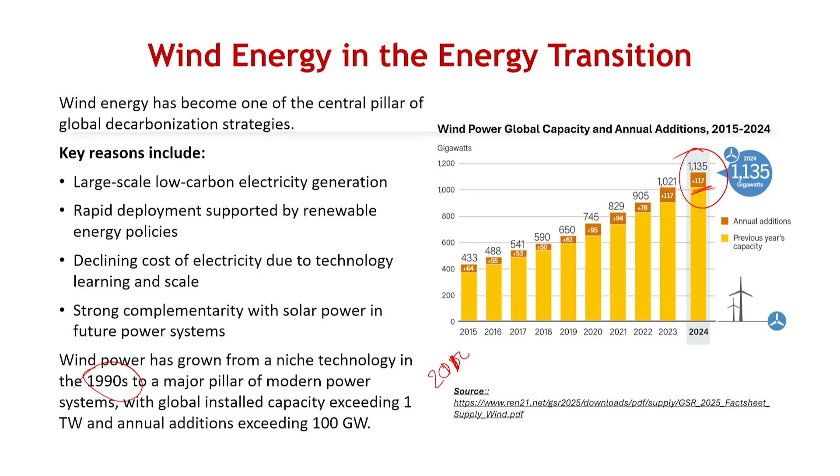Since its CUF is higher, from a generation perspective, it is already significant generation worldwide if we compare it to solar. That's pretty interesting. Also, the year on year growth has been to the tune of almost 100 gigawatts on a yearly basis - slower than solar, agreed, but nonetheless a very significant number if we look at this number in isolation.

What wind has done over the last many years is contributed very significantly in several countries already. For example, in Denmark, more than 50% of net electricity comes from wind, and almost 60 to 70% of Denmark's net electricity gets generated through wind energy, a very significant number for any country. In fact, countries like Ireland and Portugal are about 30%, Germany and United Kingdom more than 20%. Globally, wind contributes almost 8 to 10% of electricity generation and about 4% of total energy generation.

But numbers are not that important. What is more important is to understand that this is one of the very significant portions of this whole renewable energy transition which is happening.

We all know what leads to wind generation. It's basically uneven heating of Earth's surface by solar radiation, which leads to differential temperature at two places, which leads to differential atmospheric pressure. Because of the rotation of the Earth, plus areas like mountains and oceans having different temperatures compared to land, all these things lead to zones sitting at different pressure and temperature. For that equivalence to be maintained at a pressure or temperature level, there is a gradient of molecule movement from one side to the other, which leads to wind generation.

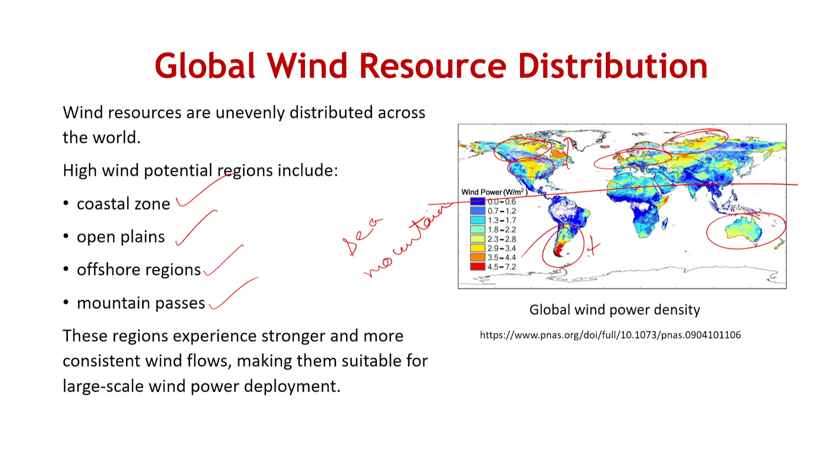So there will be specific locations within those specific geographies where the wind potential is high. Within that too there will be specific locations where wind is available more compared to other places. Unlike solar, where you can do a broader area radiation identification and broader level deployment of resources, wind becomes slightly more tricky in terms of assessment, in terms of potential and availability. That's why wind is trickier in terms of exact assessment of how much resource is available and what can be done with this source overall.

Once wind is available, how you convert this into electricity is very simple. Basically wind is blowing, so that's kinetic energy. That kinetic energy rotates the blades, which gets converted to mechanical energy. From that rotational blade, you put it on a generator, and through that generator the mechanical energy is converted into electrical energy. That's the chronology in which wind works.

So wind blows through turbine blades, creating aerodynamic forces. These forces rotate the rotor connected to the shaft, and once the shaft starts to rotate, the generator located in the nacelle starts, driving that generator and converting mechanical energy into electrical energy. Then that electrical energy, once generated, can be put into the grid and transmitted for consumption.

So that's how it's a very simple phenomenon, not very complicated. It's almost like a simple plug and play kind of model. Once you have the right turbine, the right generator, and the right blades available, electricity can be generated.

As you can see, generation will depend upon wind speed, the type of blades, the type of generator, and many such parameters. So let us look at some of these limitations, and why we need to look into them is not only from the technical side, but these limitations also lead us to understand where the windmill can be deployed.

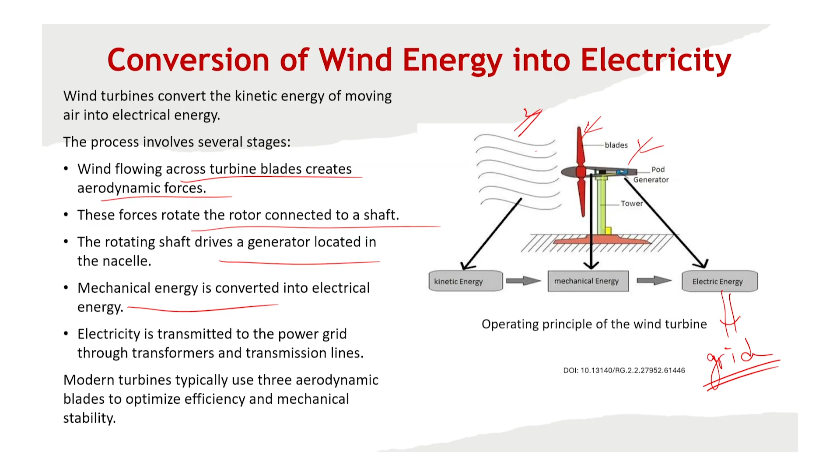In terms of power available from the wind, power depends upon the speed of the wind available, so there is a cut-in speed. Below that cut-in speed, the wind doesn't have enough kinetic energy to turn the blades, so power generation will not be there. Once you reach cut-in, typically about 4 meters per second, it starts generating.

Then there is a cutoff speed up to which it can generate energy, and a rated speed at which it gets maximum efficiency in terms of power output from the windmill. Beyond that it starts to reduce its generation, and beyond a point you reach a cutoff speed above which you cannot generate, because there's a high chance of the wind damaging the windmill itself. That's why there's always a cutoff speed put in most windmills.

As you can see, the generation of power is directly proportional almost to the cube of the wind speed. Since it's proportional to the cube of wind speed, the location of windmills becomes of prime importance. The same windmill put in an area with one wind speed versus another can lead to a huge difference in generation. This kind of variation is not there in solar cells.

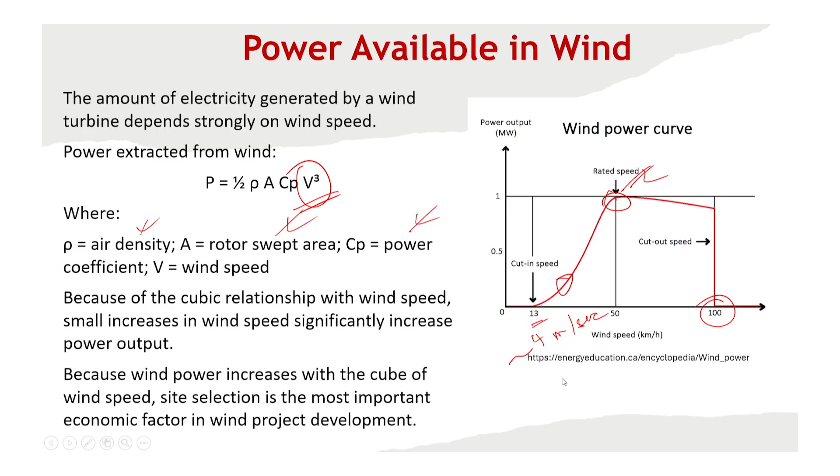That's why solar cells are slightly more forgiving in terms of errors for deployment, while windmills have a much more stringent deployment norm, because power depends on the cube of wind speed, air density, rotor swept area, and power coefficient. Higher air density means more mechanical energy, so at the same speed the blades can rotate faster. It's all about the kinetic energy present in the wind leading to energy generation, which makes it highly critical where windmills can be deployed. That's one nuance that policymakers or deployers need to keep in mind.

Second, whenever energy is generated, not all of it can be extracted. If a turbine extracted all kinetic energy, the air behind the rotor would stop moving, so additional wind could not flow through the turbine. Aerodynamic theory shows the maximum efficiency limit is about 59.3%, but typical windmills achieve about 40 to 50% efficiency relative to available wind energy. So it's not just about wind speed - you also need to consider what's the extractable limit you can potentially get from these windmills.

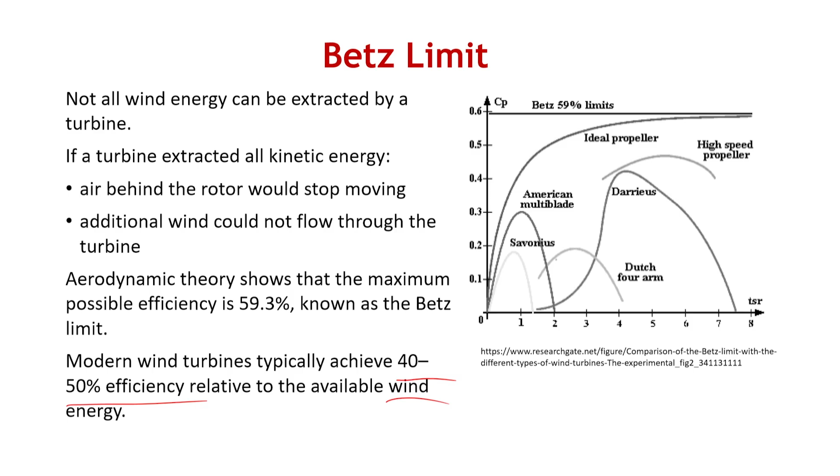Another concern, as seen from the power generation equation, is the swept area - the area covered by the sweep of the wind turbine blades, since that's where it cuts the wind. How large the swept area is will directly determine the power that a single windmill location can generate. A lot of research has happened on this, and it continues.

What's happening now is research around maximizing generation from a single deployment. If you want to maximize generation from the same horizontal location - since vertical erection means the horizontal area stays almost similar, and land becomes a cause of concern - you want to maximize generation from a single point of deployment. So windmills are getting higher and higher, and the wings are getting longer and longer, to increase the swept area.

This makes the installation of windmills very tricky, because these are sometimes put in very remote areas. Just the transportation of these big windmills from the point of manufacturing to the point of deployment becomes very tricky. I'd encourage some of you to look at videos online on how these big windmills are transported from manufacturing to deployment - that's a very tricky thing this industry faces.

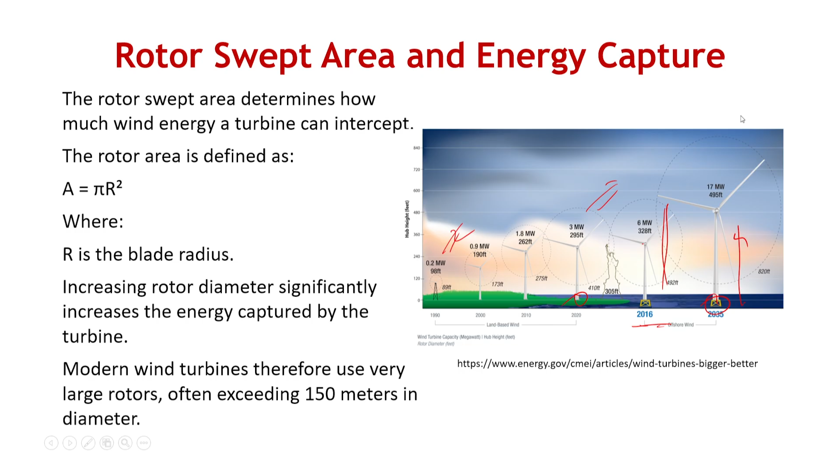So these are very, very tall windmills that we are talking about, not a small installation. The modern windmills are using larger and larger rotors, now exceeding about 150 meters, and we'll see the implication of this in terms of energy generation and possibilities.

Another technology getting developed a lot these days is the vertical axis wind turbine. It's not new, it has been pretty well known historically. So far we've been talking about the horizontal axis wind turbine, where the movement of the wind is in the horizontal direction, and the wings are moving in that plane.

The other kind of generation is the vertical axis wind turbine, where you have an axis that vibrates around a single position depending on the wind speed. It has the advantage that it can work at very low wind speed. The disadvantage is that the efficiency of such systems is usually poor, because the rotor axis is perpendicular to the wind direction, so it usually has much lower efficiency.

Large scale deployment is a concern with these, while horizontal axis wind turbines, historically used a lot, have rotation axis parallel to the wind direction and much higher efficiency because of that. Overall this technology has historically shown very good results.

But vertical axis wind turbine is a big area of research these days, specifically for geographies where high wind speeds are not available. It is being explored a lot in those specific areas. Even some research labs in the US are trying to show that for some offshore wind deployment projects, vertical axis wind turbines may be an interesting solution, so more research is going on in that area.

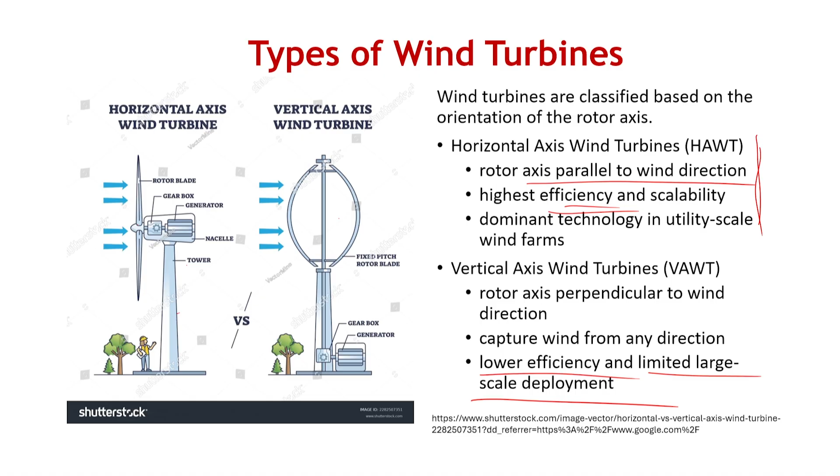Let us see how it progresses, but that is another technology to keep an eye on. Some research is also going on about generating wind power even on highways. Some of these winds are not very reliable, like from the movement of a car, since it cuts through the wind and there is movement of molecules at that point, leading to some aerodynamic pattern generation and vibration, which people are trying to capture by putting small vertical axis wind turbines on highways.

A lot of research is going around this area, and it's a kind of new research these days. So while we say all this, we now need to understand what it entails, what is the limitation factor of some of these wind turbines, what is happening worldwide from an economic level perspective. Let us try to understand what goes into a windmill.

Simply put, it works like this: there is a rotor blade that captures the wind, and a hub connecting to the blade which moves. The nacelle contains the gearbox and the generator, and there is a tower supporting the whole turbine structure, because it has to support the big weight of the nacelle and the wings overall. It's like a pole on which a huge weight is placed, and that weight is not stationary, because as the wings move, it puts additional pressure on the structure.

As you can imagine, a lot of metal goes into the construction of this thing, because it needs to be a very sturdy structure which handles all the kinetic energy of the wind it faces. It has to handle the moment of the wings and blades as they move, and on top of it, it can really sit in windy areas.

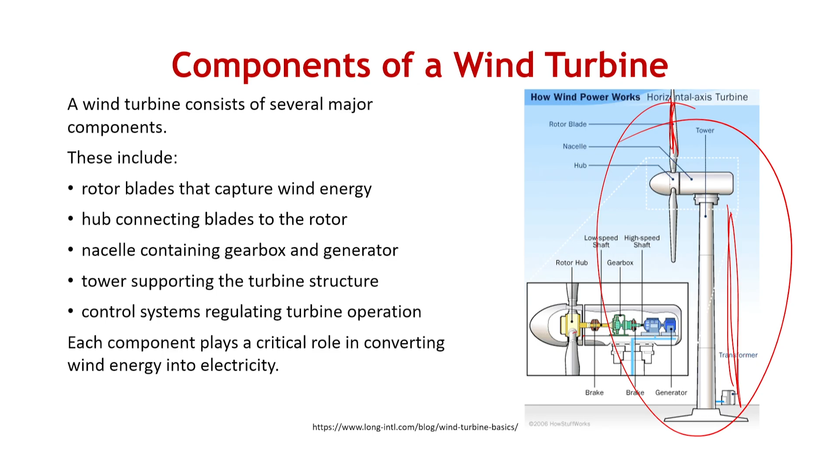That is done for two purposes: to avoid windmills having too much resistance on the wind, since if resistance is very high it can lead to failure of these windmills at times. So with all this, a lot of big wind farms are being deployed.

It is typically deployed in big areas, because once you identify a potential area where this kind of power generation can happen, you want to do a large scale deployment, to exploit the potential of that area as much as possible. Then you can put it together on a grid as a single generation point, to avoid having to connect a grid to each different structure. So overall, like in case of solar, wind farms are also increasing more and more in size.

Also, since the land area can be limited, and the sea itself can be a huge potential area, the area joining the sea and the land can be very interesting, because the wind speed in those areas can sometimes be very high.

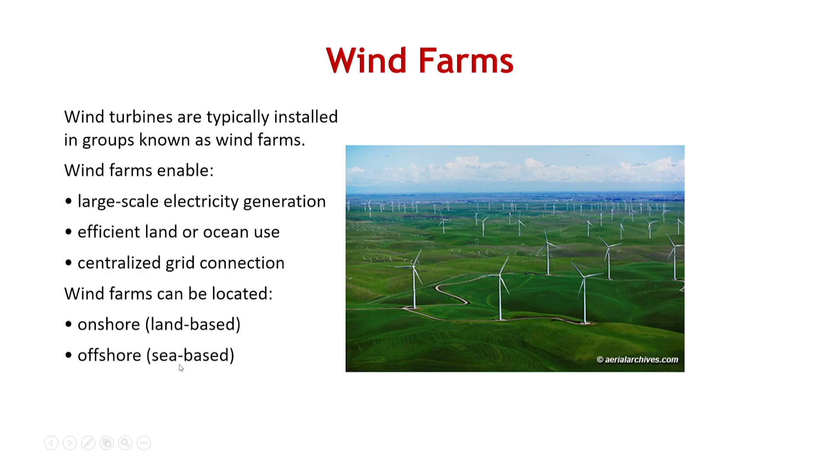So what is getting developed these days is what is called offshore windmills. Onshore windmills, which I have talked to you about, are very popular and are running about 120 meters these days, projected to move towards 130 meters. Offshore windmills are already working at a much higher capacity for the same height.

Just to compare, for a hub height of 130 meters, projected for 2035, a typical windmill capacity will be 5.5 megawatts. But a typical offshore windmill of about 100 meters can have a capacity of 6 megawatts, just because of two factors: the wind speed can be higher, and the wind availability in the day can also be higher.

Again, remember what I talked about in terms of solar, like CUF. So CUF of offshore windmills is higher, and the specific wind available is also higher. So overall, a lot of installations these days are talking about offshore wind turbine deployment.

At a very high level, onshore winds have a lower cost of installation and lower maintenance cost, because they are sitting on a land area, so reaching and maintaining them is easier, and they can be easily connected to grid. That's why onshore wind constitutes most of the wind power generated today.

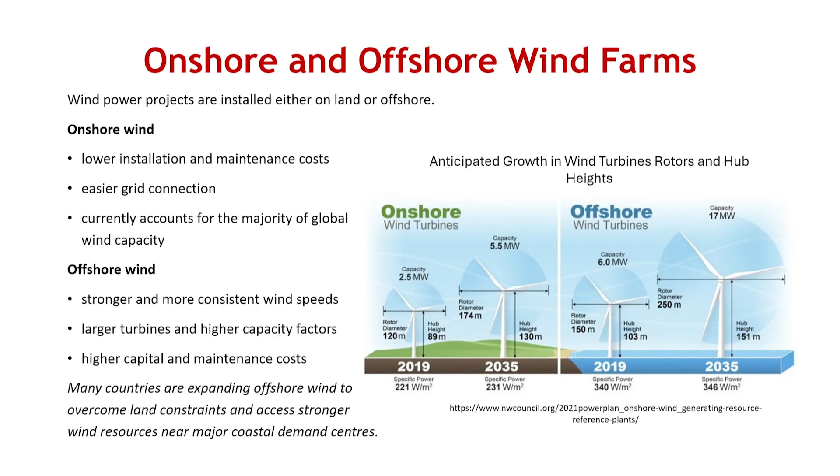Offshore has huge potential, because stronger and more consistent wind speeds are available in that area. Larger turbines and higher capacity factors are possible, but at the same time it would also mean higher capital and maintenance costs. So this will have its nuances. What will finally determine it is the potential of a specific area and the cost of generation, and we will see some more numbers on what that looks like.

When we are doing wind farm deployment, one factor we need to worry about is called the wake effect, where wind cut by a specific windmill can impact the wind availability for the next windmill just behind it. Part of the energy is extracted, so wind speeds can decrease and turbulence might increase, creating a wake area between one windmill and the next.

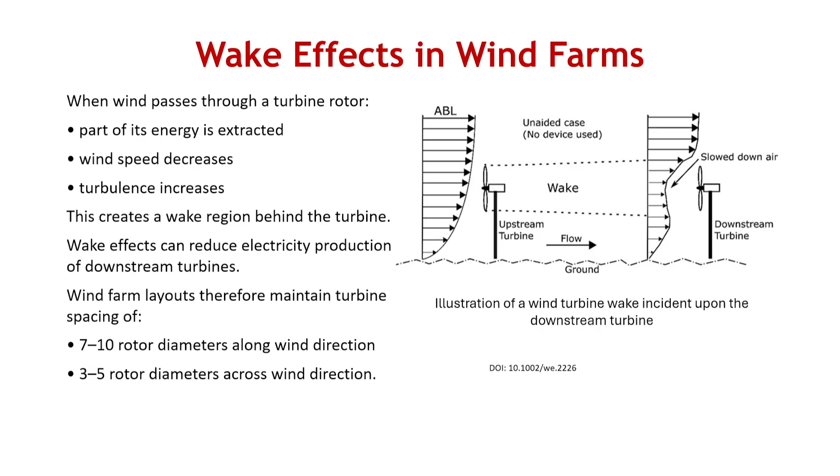When deployment happens, usually a minimum distance is kept between two poles of wind generation, and sometimes they're not placed in the same direction. Sometimes there's a cross deployment between one tower and another, just to avoid the wake effect impacting the other. So a lot of technicalities go into this deployment.

For finding the potential of these windmills, we do a wind resource assessment, usually using wind speed measurements at different heights. We go about finding what wind speed is available and what the long-term wind pattern is for that area.

Then we estimate the overall energy potential of that specific area. We evaluate the whole terrain and do surface roughness measurement. So overall, a lot of background work is done before we do this windmill deployment.

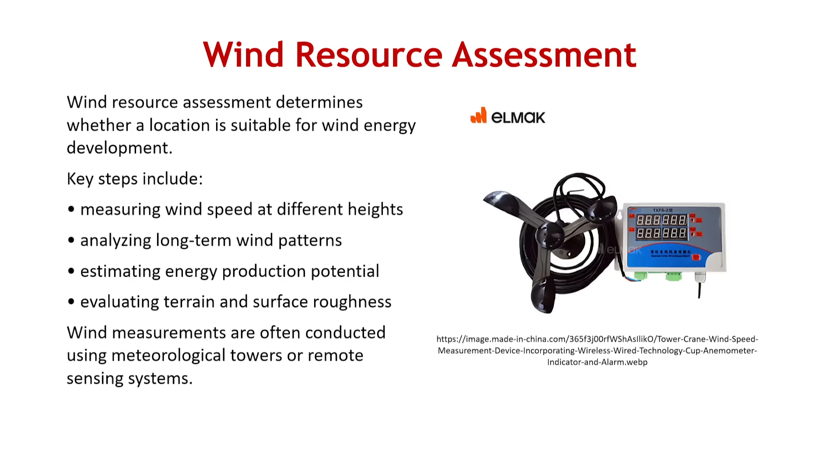It depends a lot on the wind speed, the availability of wind throughout the year, and what kind of seasonal variations we're talking about. This all has policy implications, because when releasing tenders, the assessment of the resource has to be done with much more rigor, otherwise the whole tender specification may not be met.

Once you do all this exercise, since wind is a very interesting resource available throughout the year, one of the big things seen all over the world is that while typical solar PV capacity utilization factor was in the range of 18 to 25%, India was sitting at about 19.5 to 20% CUF. These onshore winds can have much higher potential of 30 to 40% CUF, and that is impressive.

So the same 5 megawatt installation in that term can give about 20 to 30% more production, which could be higher, leading to the lower LCOE of windmills more or less all over the world.

Offshore winds, as I showed you, can have higher CUF because of wind speed. The availability of wind throughout the day could be higher because of the temperature difference between the sea and land area. And since these installations are usually around the coastal area, within a few hundred meters of the coast, wind speeds are usually very high.

With this in mind, offshore wind can have a capacity utilization factor much higher than that too. So that's a very interesting phenomenon to understand.

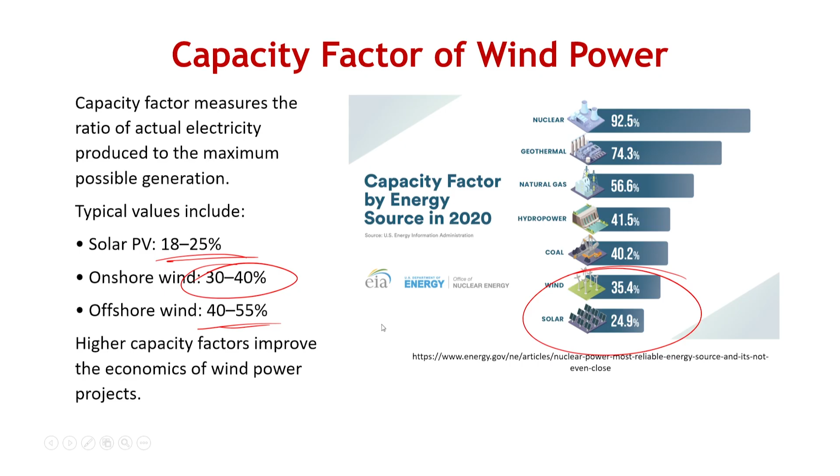With all this put together, we can do an energy yield estimation of the wind. Depending upon wind speed availability, wind distribution, what kind of turbine is available, and what kind of wake losses we have in our deployment, we can do an estimation of exactly what power will be generated.

Of course, there will be an upper cut limit above which the power will not go up. At around 25 meters per second, this is the cutout speed above which you don't allow the windmills to operate, and you lock the wings so they don't move, otherwise there are chances of the wings getting damaged.

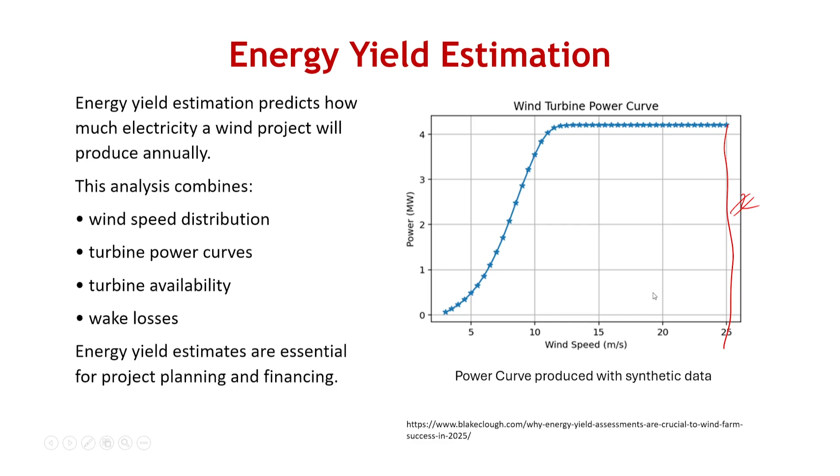With all this put together, the global capacity, as I showed you this data earlier, has really grown pretty big. We are talking about more than 1 terawatt. I will talk about this number with you.

Annual capacity is exceeding about 100 gigawatt year on year, while historically it is Europe, China and United States which has done more deployment. More and more deployment is happening in countries like China and India. So India is also catching up in this race, and it is becoming one of the top generators of this renewable energy source from wind.

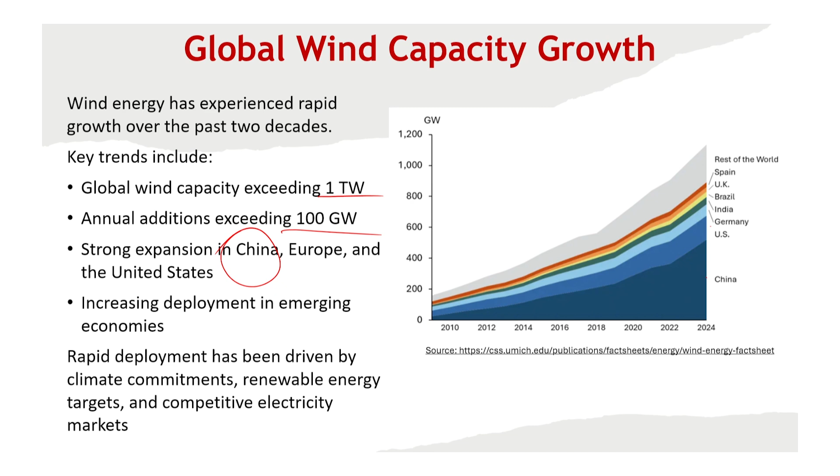If you start looking at this graph, India is coming out almost at the 4th or 5th place in the world, which is very significant given the late start India took, making a serious dent on this line. This is becoming an interesting proposition from that perspective.

And of course, what led to this, and we've already talked about this number a bit, is that the cost trend in wind energy has been pretty impressive. This is one of the best LCOE shown throughout its journey for many years now. While solar started giving this LCOE here itself, wind has been giving very impressive LCOE since around 2010, 2011, or maybe 2014.

Of late, it has increased a bit, and the reason is that some metal costs have gone up, and supply chain issues have led to this increase in cost of onshore wind deployment. But still it is one among the lowest cost sources of electricity as of now, comparing to solar. So now it has caught up with solar. It used to be lower than solar at this point, but now it is almost equivalent to solar in terms of actual LCOE.

Offshore wind cost, however, is slightly higher. While onshore wind was about $50 on average, offshore wind has been on the higher side, and the overall total cost of installation has also been high. The reason is that there has to be construction and installation on the sea, an offshore transmission structure has to be put in place, and maintenance has to be done in a very harsh marine environment. That's why the offshore wind initial cost of capital has been pretty high earlier.

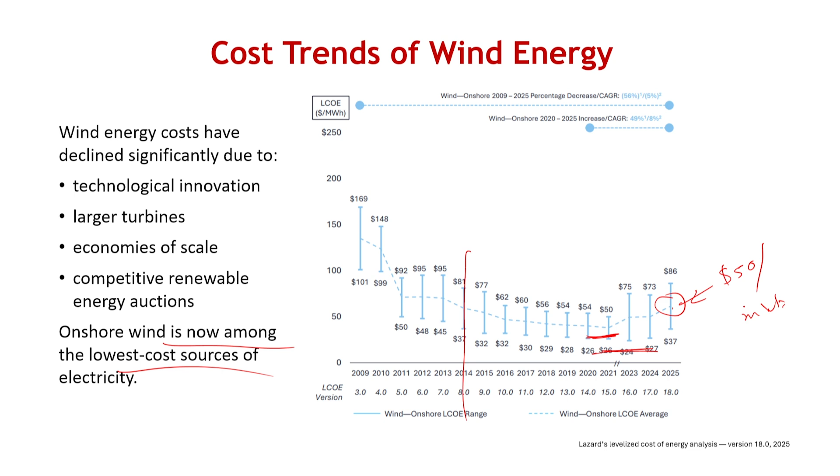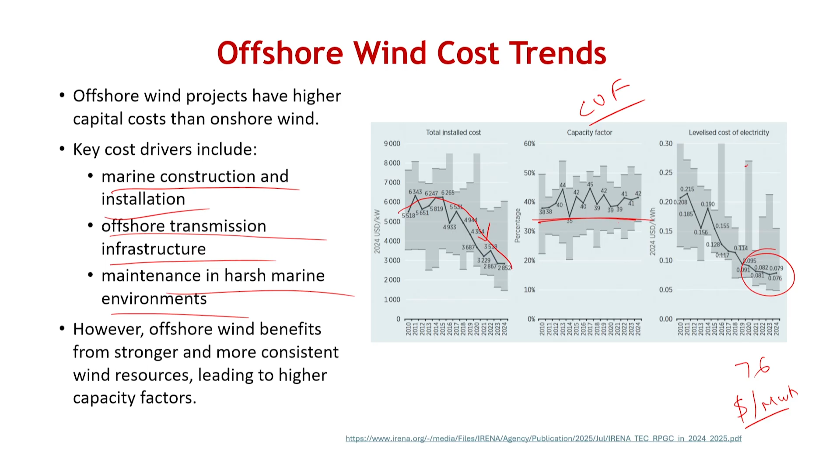What we've seen is that with technology improving, that cost trend is coming down, and given the impressive capacity factor, since the CUF is pretty high, the LCOE has started to look very impressive for this specific technology, and is now catching up with onshore wind. Onshore wind averages about $50 per megawatt hour, and offshore is reaching about $76 per megawatt hour. So it's slowly approaching that number, and what's expected is that in the next few years offshore windmills can start looking more and more impressive as the technology improves and more economies of scale set up in this domain, making this an interesting proposition.

As many of you will recall, just a few slides back I talked about this heavy structure which we need to put up for these windmills. Given that, if you look at the material use of these wind turbines, it's no surprise that the highest amount of material used is steel and iron, because a very heavy steel and iron pillar needs to be erected and kept in place for these windmills to be held. The second highest is composite material, primarily the blade material. These two are the highest requirements as far as these windmills go.

Then there is copper requirement, and some rare earth metals required as part of the motor and the whole energy generation process, and some of these materials will start becoming tricky as we grow very fast. As you can imagine, this will continue to put pressure on more and more steel and iron generation as we do so much wind deployment going forward.

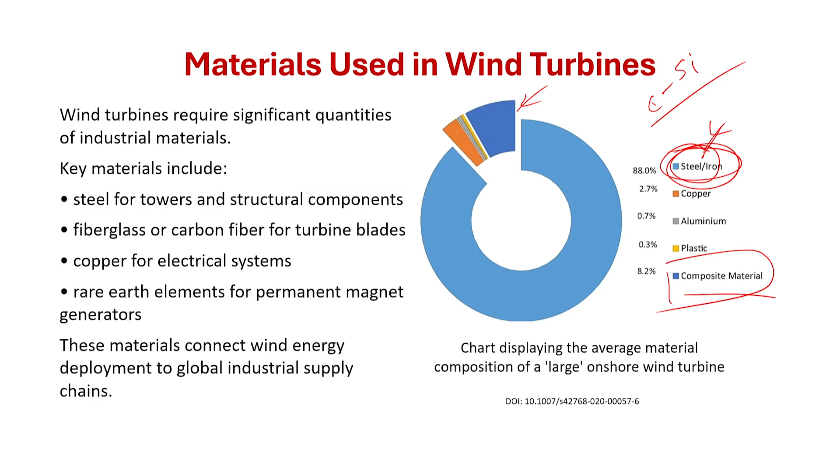Composite material itself has a big carbon footprint in terms of its generation. So overall, if you look at the whole carbon footprint of windmills, it primarily comes from steel and iron. Remember, for solar, crystalline silicon is the prime material responsible for carbon generation. In case of windmills, it is primarily the use of steel and iron which is responsible for this carbon footprint generation.

And if you start looking into the material supply chain challenges, what you will see is that many of these materials have increasing demand on rare earth elements. But the bigger concern, similar to what was happening in solar, is that if you look at the wind supply chain analysis, one country, specifically China, has a lot of control on the overall supply chain, be it plastic, silicon, silica glass, cement, rare earth, lead, even iron and steel, aluminum. A lot of this supply chain is again controlled by one country.

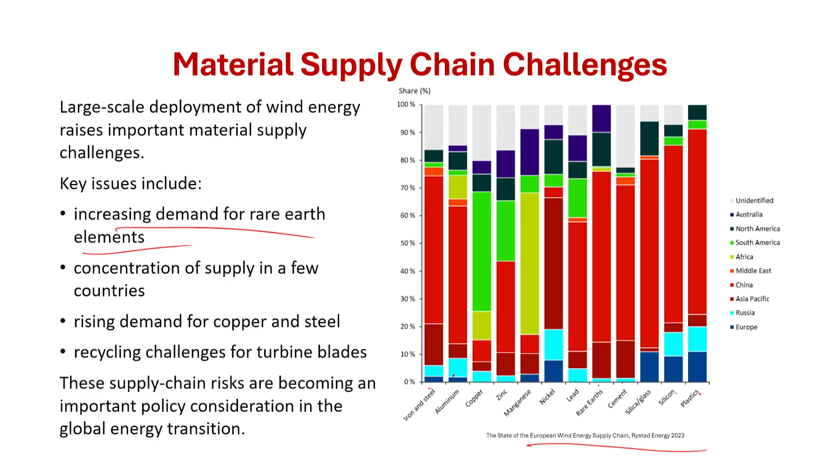So effectively it is China which is kind of controlling the whole renewable energy transition of the world, because solar and wind, the two prime sources seen as the potential transition for renewable energy generation, have their supply chains getting controlled by one specific country. This is not a very comfortable situation for the world to put so much onus on these two technologies, and it is becoming geographically limited with respect to its supply chain. So that is a concern.

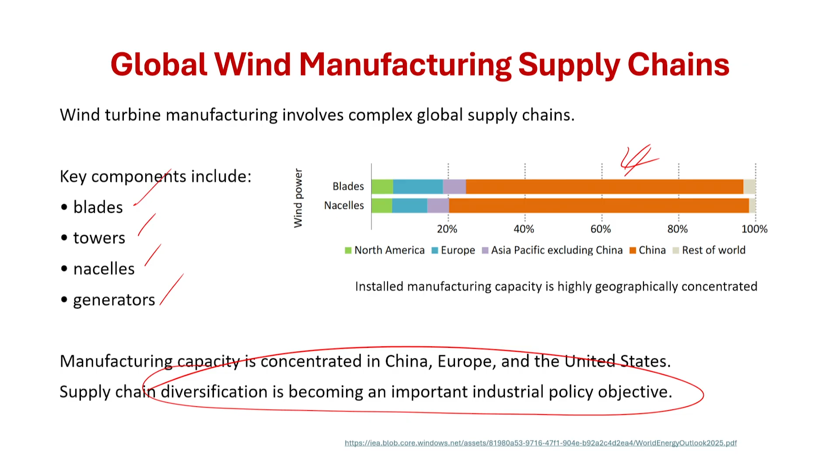So supply chain diversification is becoming an important industrial policy objective as far as the supply chain goes into picture. If you start looking in terms of investment, what you will see is that the maximum investment happening in wind is coming from China. As you can see, in this wind area, both onshore and offshore, the maximum amount of investment is coming from China.

If you look at the whole installation happening, China is the prime driver for onshore wind as well as offshore wind. The prime investment is coming from China itself. The second one putting money into offshore wind is Europe, and for both onshore and offshore wind, it is primarily China putting the money, followed by Europe, then followed by North America. So these are the prime three geographies putting a lot of money into this.

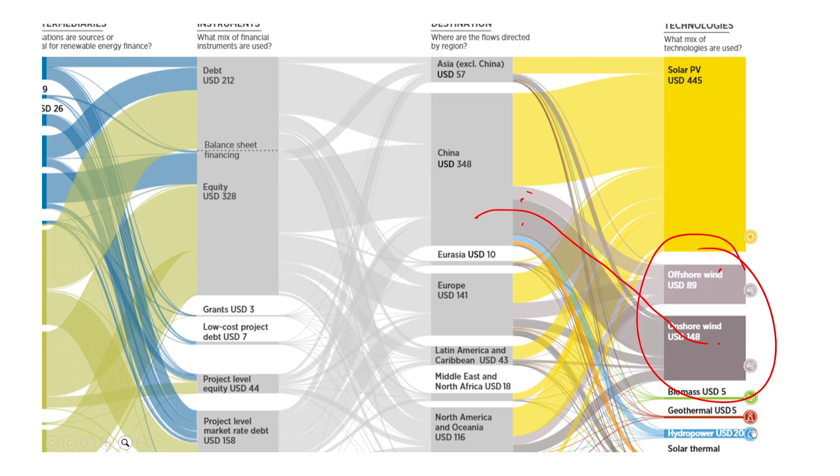What we need to see is that there is a bit of Asia excluding China, primarily India. India is primarily putting its onus onto onshore wind as of now. But if you look at overall investment, offshore wind investment is coming almost equally from China, Europe—Europe even more than China—and North America. So these are three geographies where this investment is primarily coming into. As far as onshore wind goes, it is primarily China, followed by North America, some European countries, and India specifically. So onshore wind is slightly more distributed, while offshore wind is primarily driven by three geographies.

But if you put it all together, it is not only the material side of the story, it is not only the manufacturing side of the story, even the investment is coming primarily from China in these two things. And this is not a surprise given that China is the highest emitter in the world.

So, they are putting a lot of work around renewable energy sources, but the concentration of the effort is something that is a concern for the world overall. Investment has been impressive, about 196 billion in 2024, less than solar. Solar was about 445 billion US dollar, both put together was about 250 billion US dollar combined. So that is impressive, but what is the cause of concern is that China remains the largest investment market, accounting for almost half of the global investment, and that is a slight concern. More spread should be achieved around this.

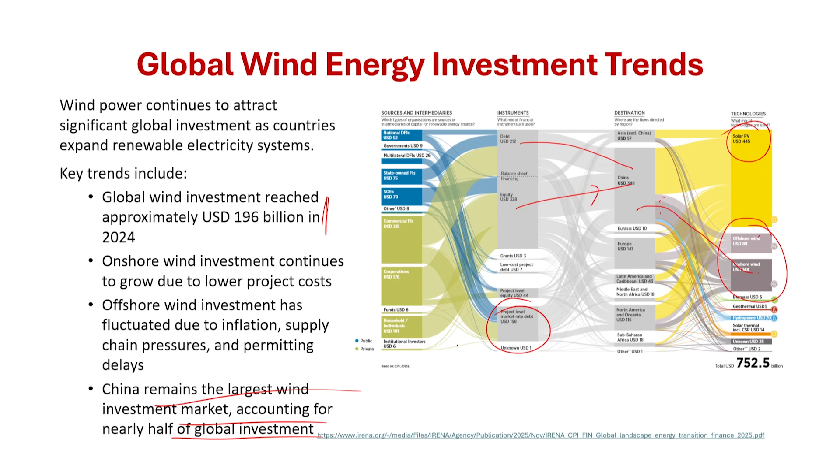If you look at the financing structure of wind projects, they are typically financed through project finance structure, which includes a mix of debt and equity. The instrument is coming more both from the debt side as well as the equity side. The structuring is happening from both sides. It is a project level thing which is driving from the European side and the North American side also, so it is project financing which is a mix of debt and equity.

Long term PPAs are signed to ensure revenue stability. So it is a policy driven framework which is driving this whole investment coming into this sector. A lot of stable policy frameworks and predictable electricity markets are critical for long term capital to flow into this market, and that is another thing this sector will depend upon and we look forward to.

If we start looking at India, India's wind energy potential is also interesting, though not as good as maybe some of the North American countries or Brazil or some other geographies. But having said that, overall if you look into India, the key development is happening in Tamil Nadu, Andhra Pradesh, Karnataka, Gujarat, Maharashtra, Rajasthan. These are the geographies driving the whole pathway of renewable energy, wind energy deployment in India.

The CUFs are not as impressive as the world CUF, but having said that, the CUFs are typically of the order of 30%, which is higher than solar. There is some potential in Ladakh, but there are some ecological concerns of putting these windmills in this area, so that is why not a lot of deployment is happening there so far.

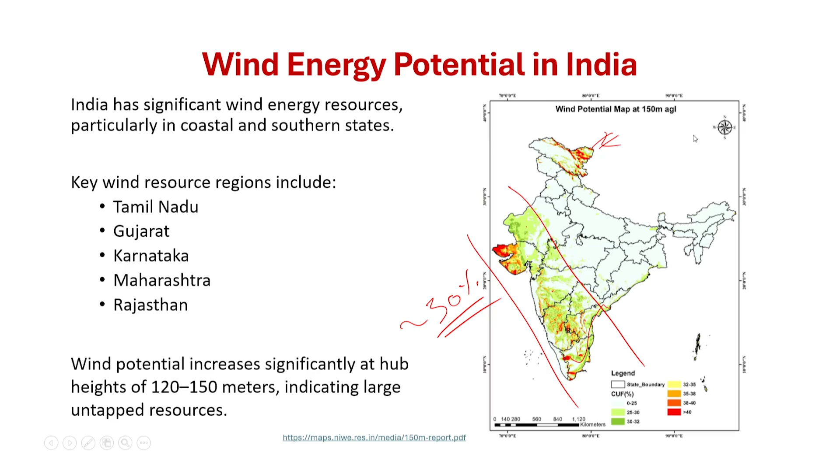So, most of the deployment in India has really been concentrated into this geography. With this, the current installation in India has been 54 gigawatts, which is impressive given where India started. India's journey started back in 2009, 2010, almost like when solar started. The journey has ramped up from that phase.

If you look at the initial years, the deployment of wind was much higher than solar deployment, because it was already a proven technology in the domain itself in those years. But what we saw was in between there was a period of flattish deployment of wind. Of late, though, there has been a resurgence in wind deployment, primarily coming from hybrid projects combining wind and solar, and I will show you why this is happening. Wind has got a new lease of life in recent years, specifically with more hybrid projects coming, wind and solar.

The reason for that is the wind generation in India, if you look into this for a specific geography as per a research paper, typically the months of maximum generation show a huge seasonal variation, much higher than what you saw in solar. As you can imagine, there will be seasonal variation because wind depends a lot on weather patterns, on the temperature difference between two geographies. A landlocked area will not have that kind of high wind speed, so that will always be a cause of concern.

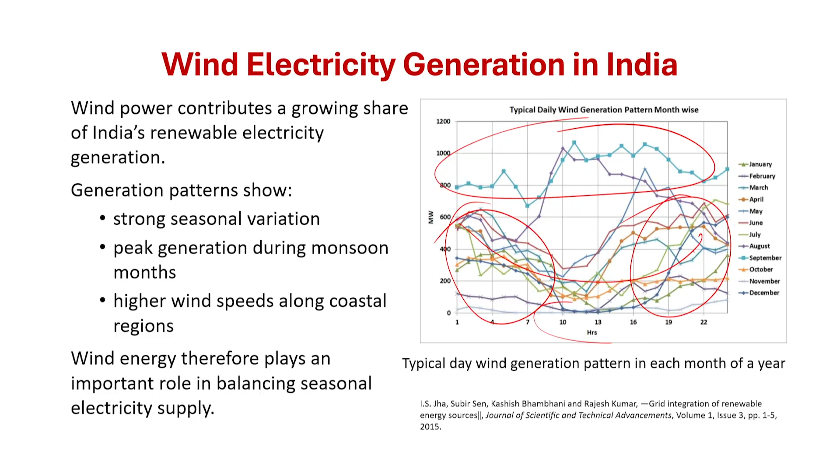This brings a very interesting perspective: if you combine plants of solar and wind together, you can have the potential of generating energy almost throughout the day, with some source or the other.

With this in mind, a lot of studies have been done on solar-wind complementarity, and what is seen is that solar and wind can complement each other a lot, because solar peaks during the daytime with its highest output in the summer months, while wind power is often stronger during evening and night hours, with higher output during the monsoon and winter season. Overall, there is huge complementarity between these two technologies.

With this in mind, India is putting a lot of emphasis on hybrid projects, which are a combination of wind and solar put together.

So overall, there are specific geographies where these hybrid plants can give very high CUF. And when you start talking about CUF of that order, renewable energy starts looking more and more impressive if you put both things together.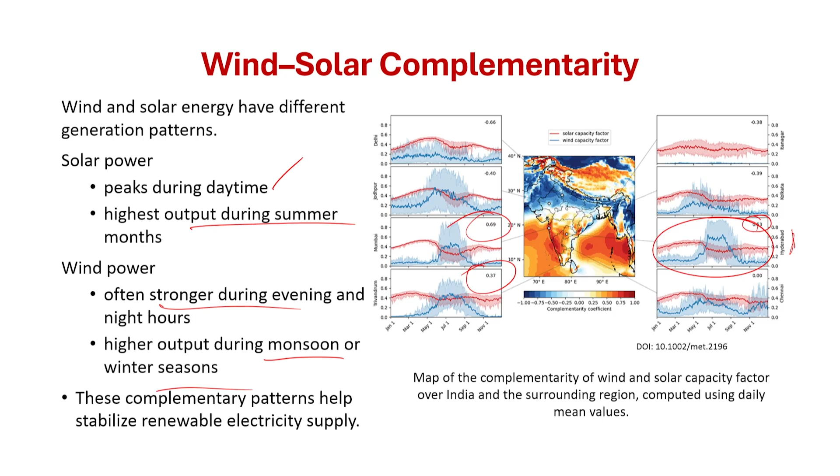More solar and wind hybrid projects are being put to tender these days. Advantages include higher combined capacity utilization factor and better utilization of transmission infrastructure, because transmission not only supports solar in the daytime or only supports wind when wind is available, but together, the transmission system can be more utilized, with more flow of electrons almost throughout the day.

There is also reduced intermittency in the power output, which is another interesting factor. So overall, the economic viability of renewable projects goes up, and that's why India has introduced a policy to promote large scale wind-solar hybrid through the national wind solar hybrid projects policy, which is new and looking very interesting.

As of now, hybrid capacity is about 7.7 gigawatts, which is not very significant compared to 125 gigawatts of total installation, but the projects in the pipeline are pretty impressive, about 30 gigawatts. So this is the trend in which it will move.

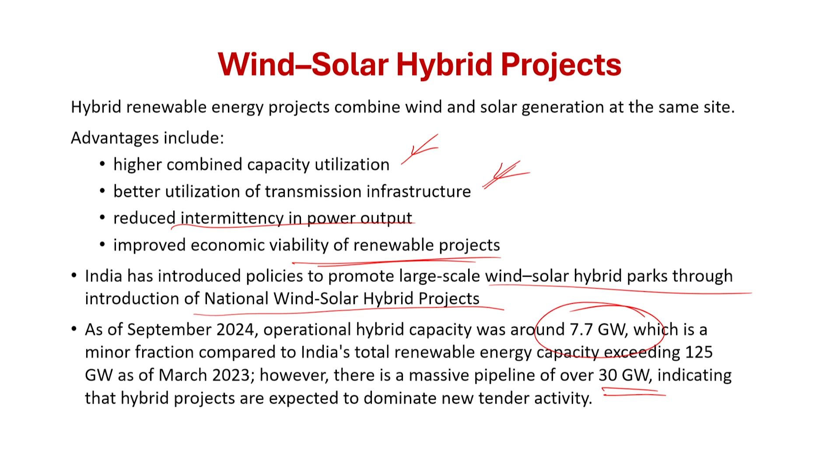Wind has its own potential for huge energy generation, specifically in geographies around coastal areas, and where there is a temperature difference between land and sea, or between mountains and land, like around snowy peaks. So while that energy generation potential is high in those geographies, even for India, which doesn't have much snow-clad mountains apart from the Himalayas, there is some coastal area availability.

Given the high potential of solar in India and the potential of wind in India, if you start putting them together, this whole thing can start looking very impressive and very interesting.

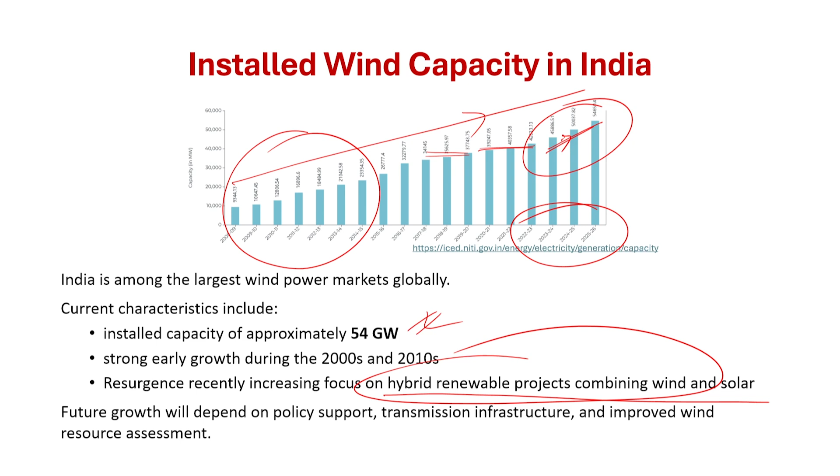And that is what Indian policy makers are now heading towards. More projects are being pushed which are a hybrid of solar and wind, and that has given a new lease of life to wind, which I was talking about, after a period where wind deployment was becoming almost flattish.

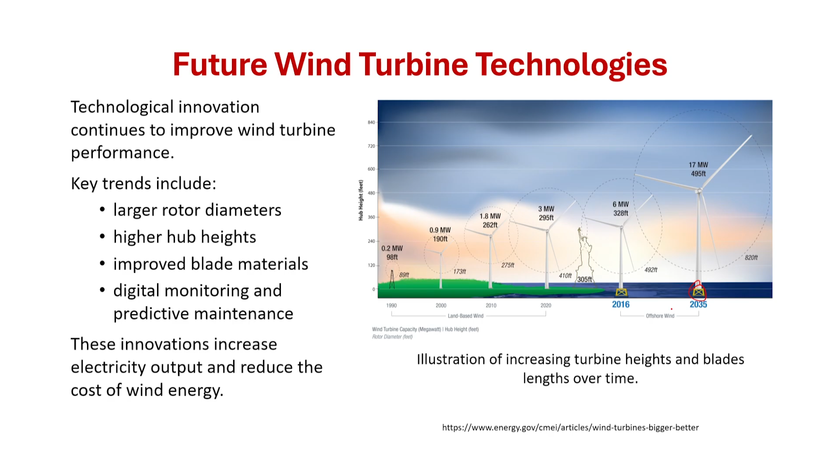With this, almost the future technology I already talked about - larger rotor diameters, higher hub heights, new blade materials - these will continue to improve the per square meter of deployment. The swept area will go up, and rotor speed, rotor type, generator efficiency will all keep improving. So generation of future wind projects looks very impressive, and combined with solar, it could be a very interesting thing.

Of course, there are few challenges which I mentioned in between: there is variability of wind resource which we have to take care of, and it could lead to issues on grid stability. It could also lead to issues with CUF not being stable - unlike solar, where CUF is much more stable. There could be land use constraints also.

There have been some reports in Europe where residents have raised concerns that it disturbs the ecology of their specific geography, impacting the movement of birds, and the noise these windmills generate during operation due to the rotating parts. Those kinds of concerns keep coming, and that's why offshore wind is becoming slightly more popular as we go along.

There are transmission infrastructure limitations - we already talked about this because of the intermittency of the source. Last but not least, there could be supply chain bottlenecks for turbine components, because of concentration of ownership of specific materials and manufacturing limited to specific countries, which is a concern if you want to put a lot of bet on this technology overall.

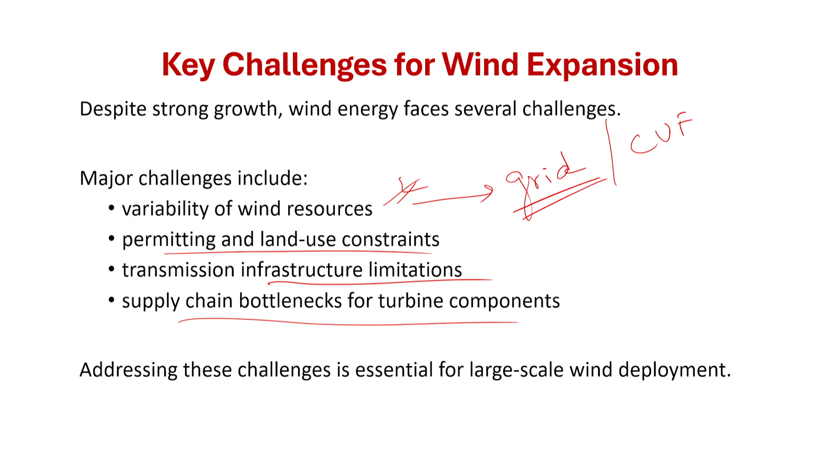But having said that, what we are seeing is that wind and solar together are expected to become the backbone of the future power system. Given the complementarity of the two technologies, they can support each other in a very interesting way. With that in mind, these two combined can become dominant sources of electricity in many decarbonized power systems, offering abundant renewable energy, declining generation costs, and complementary generation patterns.

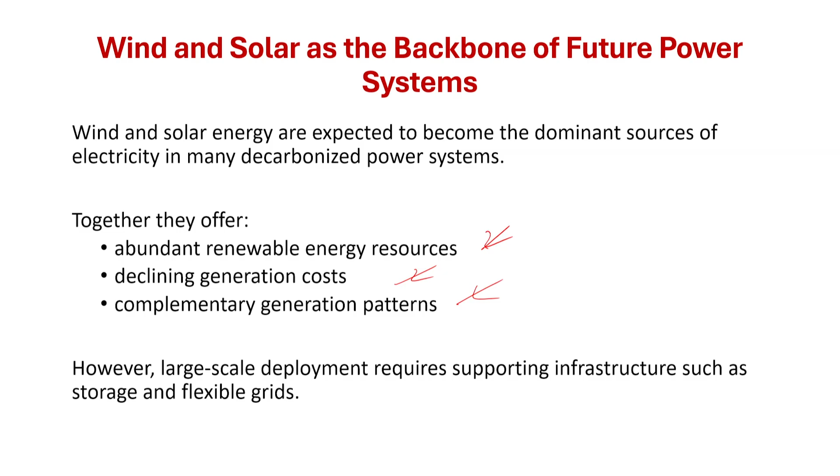So putting this together, you can now make sense of it - when the world is putting together an energy transition plan, it is putting a lot of onus on electricity, and under that electricity onus, it is putting a lot of onus on wind and solar. Now you can understand why so much onus is being put on these together.

The next thing we will look into from the next lecture onward is that there is still an intermittency issue - it is still not 100% CUF we are talking about. There is still an issue where generation could be unstable, and for that, as some of you would recall I talked about, we will need storage as a complementary technology to this whole transition.

So from next lecture onwards, we will start looking into what storage technology is, where it stands, what is coming in the market, and how it is supporting this whole journey of the solar and wind dependent energy transition movement, which is an electricity dependent movement - what role and what form storage would take to support this energy transition.